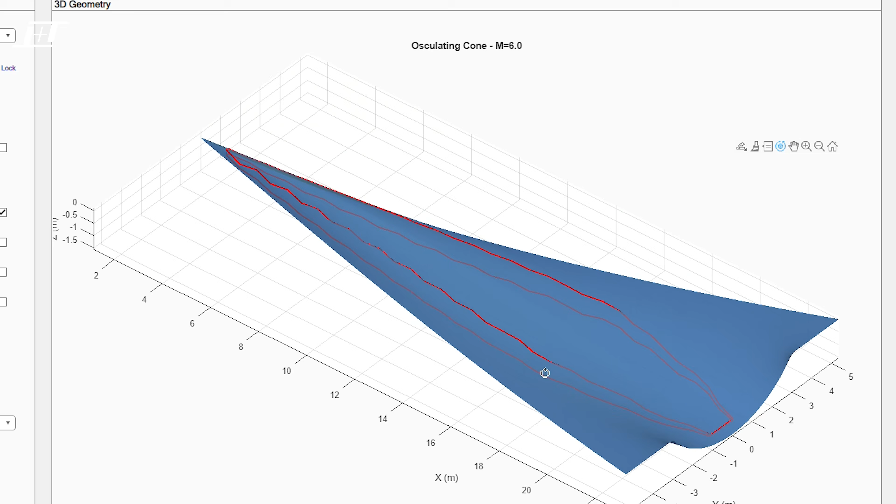Longshot's here to crack the solar system open like an egg. We're building a multi-injection gas accelerator to throw massive vehicles to orbital velocities and put them directly into orbit.

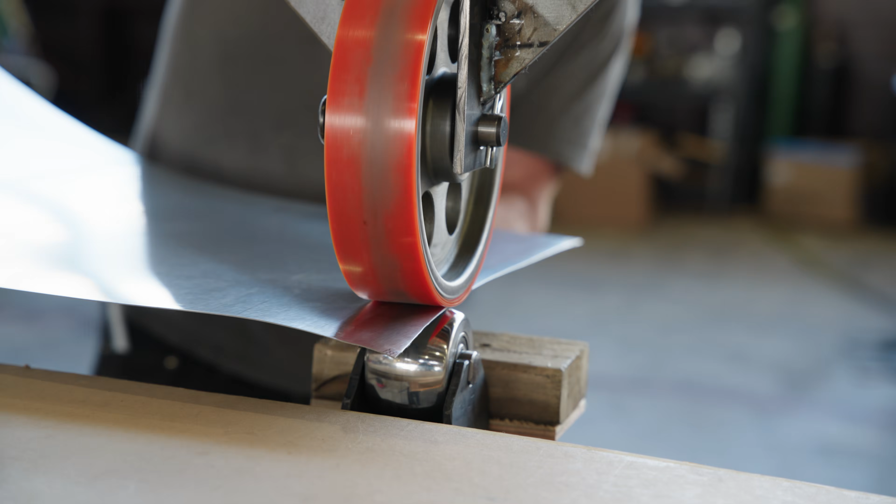The current project we're working on is called the Waverider. It's basically a model of the hypersonic vehicle that will eventually be shooting out of the accelerator.

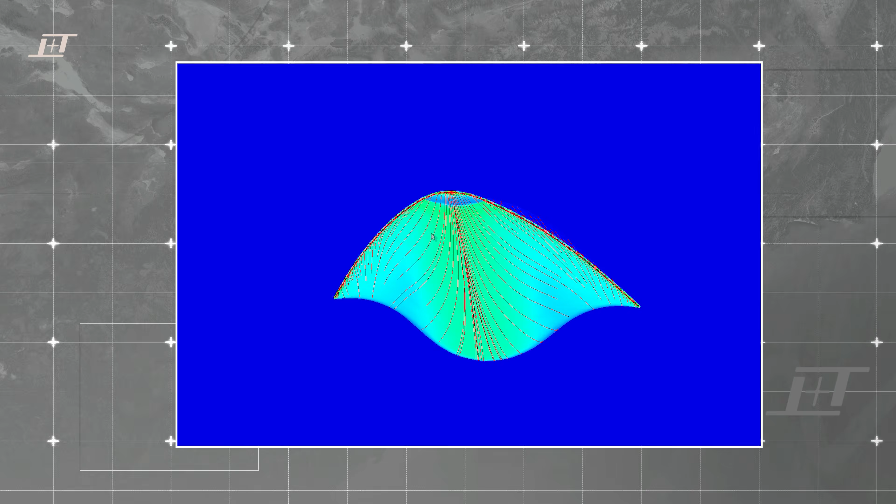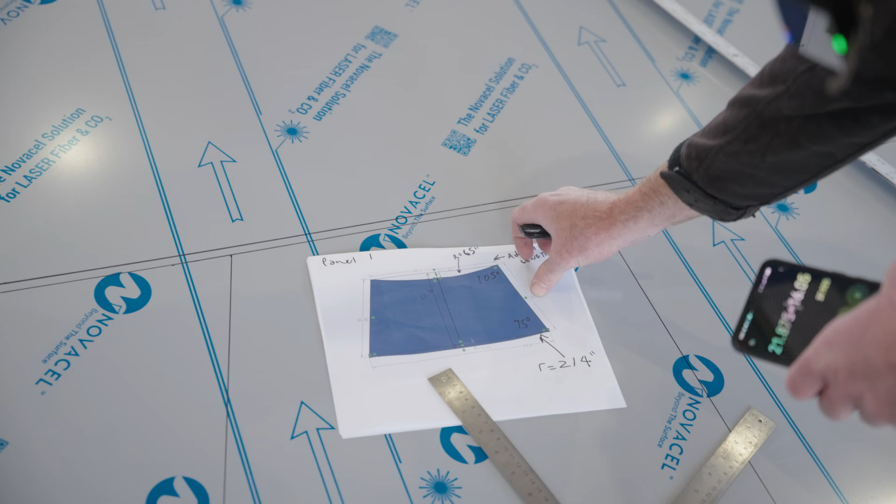The engineers have a MATLAB setup that automatically generates a Waverider for a particular Mach level. Each Mach level has a different shape Waverider associated with it. That outputs a 3D shape, and then I can convert that to a SolidWorks part, and from there we can map out the surface so that we can produce it from sheet metal.

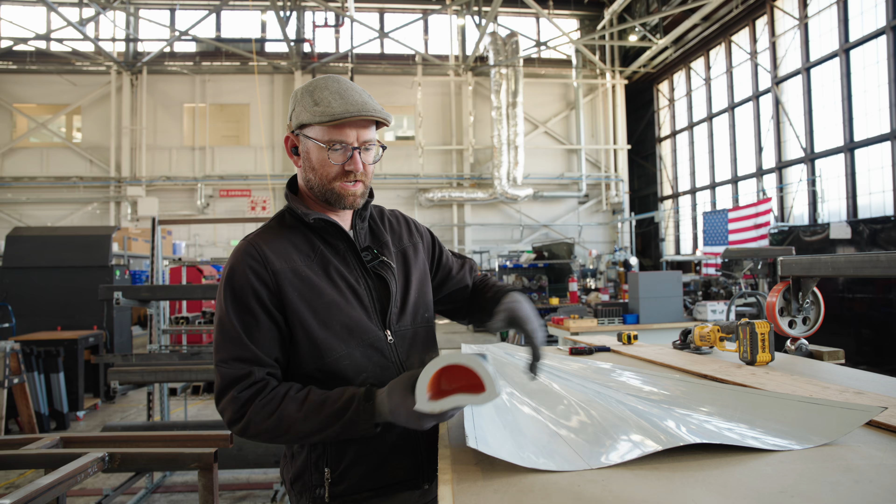This is a small scale version, which fits in our 6-inch accelerator, and we're basically scaling it up. So we have the bottom here, this flange is going to get tipped up, so it's going to be at a 45-degree angle like that, and then we have these other panels that get arched over the top and then riveted onto this flange.

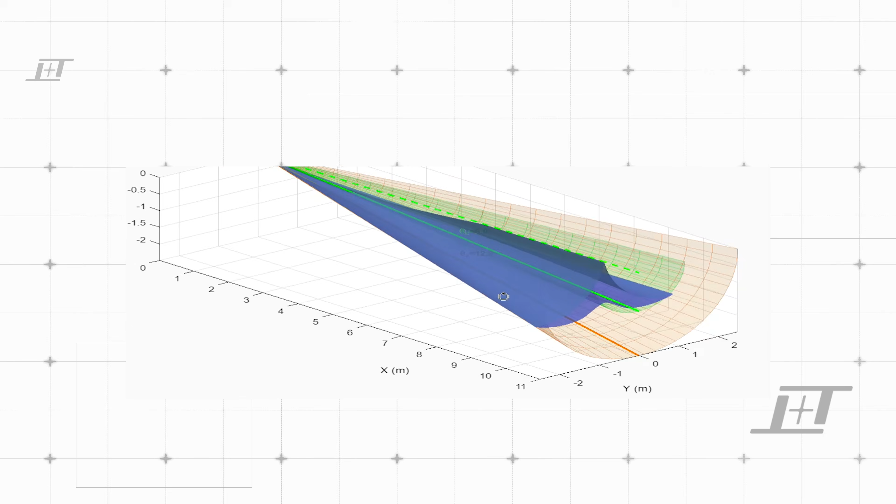We have an internal tool that we can take given design parameters or flight conditions that we'd like to model around, and this one was just a quick example. I believe we chose Mach 6 as the starting point, and then we knew we wanted a certain amount of area inside. So it's rounded at the top right now to ensure that we've got a larger internal volume for, in the future, onboard telemetry, flight computers, whatever payload is desired to be in there.

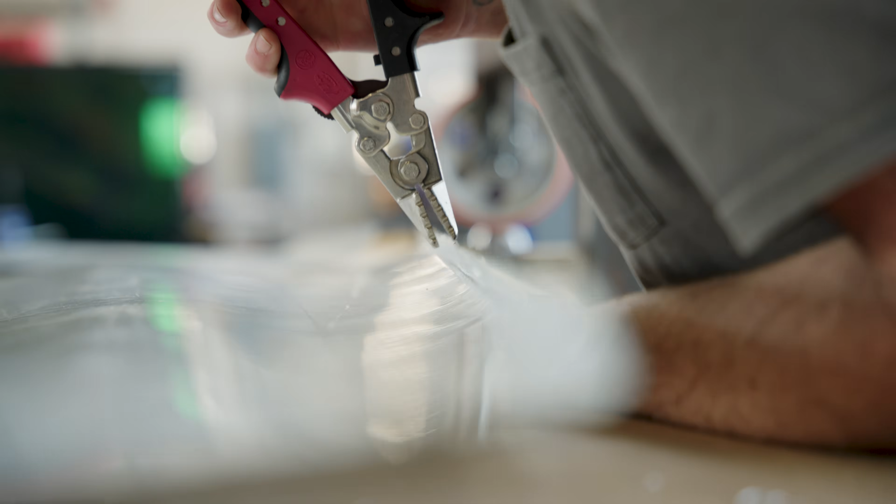We were making some small versions, and there's some initial legwork to figure out what gauge of metal we should use, because we don't want it to be too heavy, but we also want it to be strong. We also need our current tooling to be able to handle it. So I did a couple test pieces, and it seemed like 22 gauge was just fine for what we need, and much lighter, much cheaper, so we went with that route.

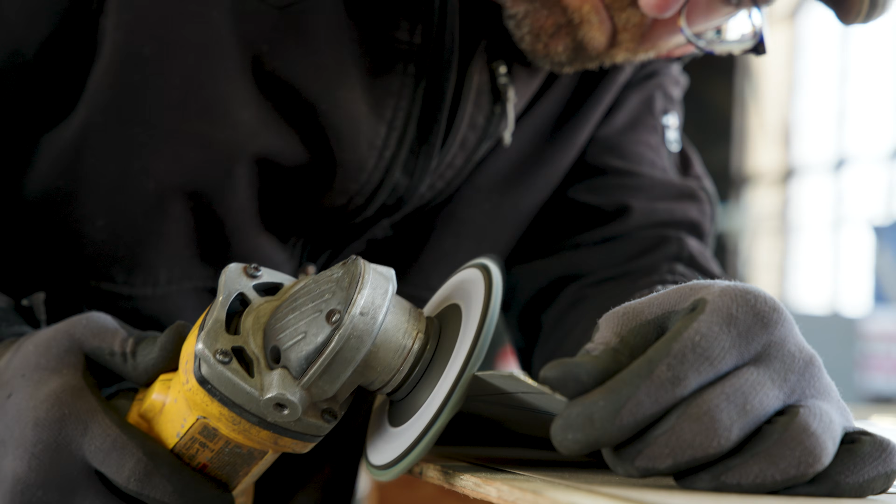Pretty much every project you work on, you have to either make a tool or modify a tool to get it to do what you want. For example, the English wheel, we could have bought one, but it would have taken too long to ship here. So we bought the wheel parts, and then we had metal around, so we just made the English wheel, and that worked pretty great.

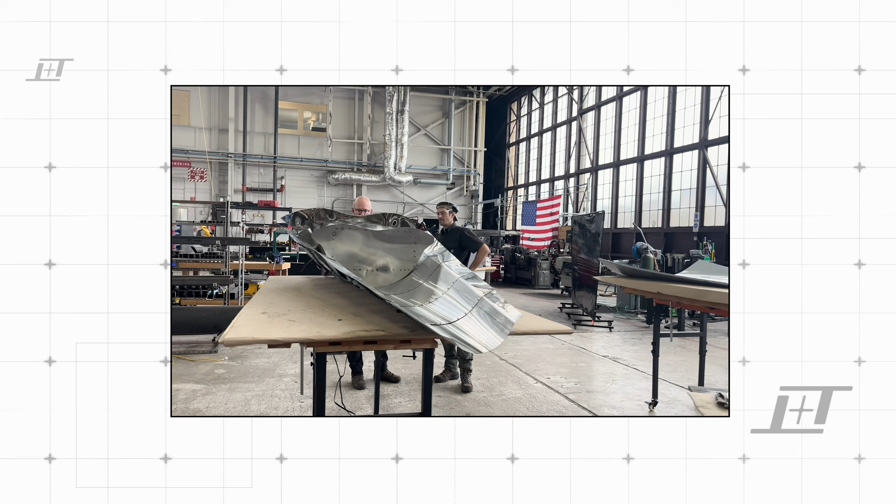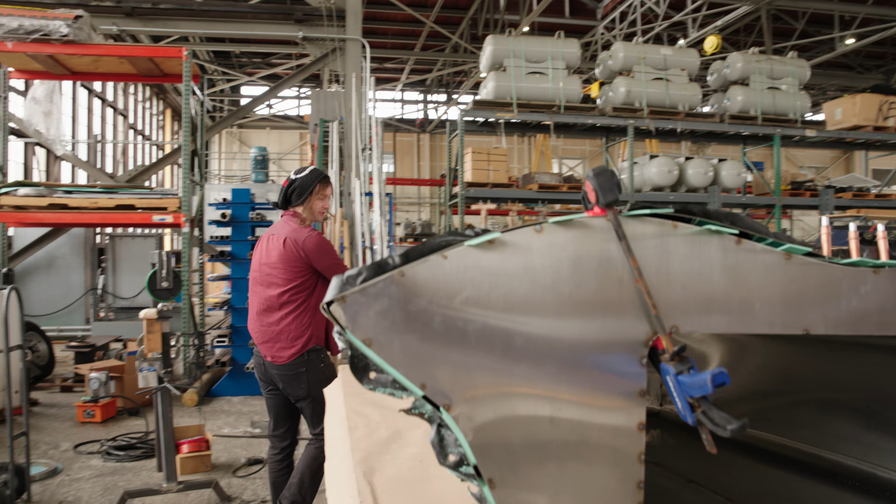This is what we call the compression surface, so basically your lifting surface. The important part is that we could trace a line right along this leading edge all the way to eventually the nose, and it would measure exactly our expected shock angle given our nose geometry.

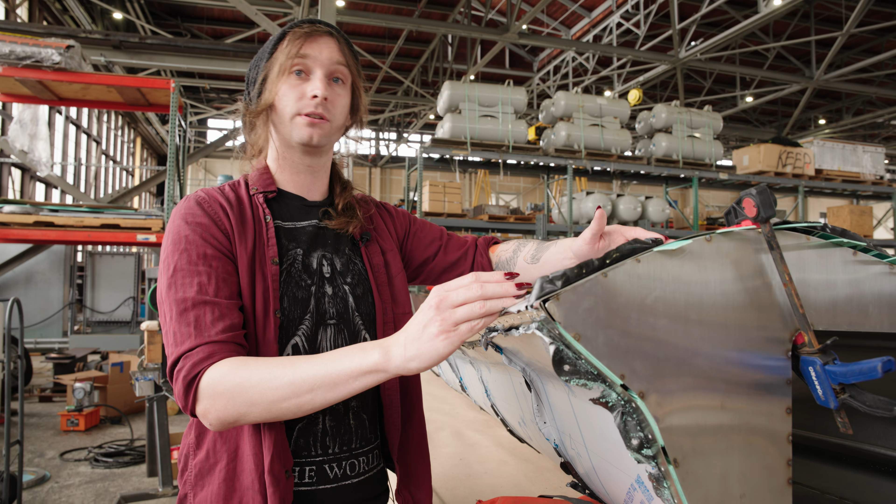If we were to look at this like a plane, these corners would be your wings, and we can decide how much of it we want attached to the actual shockwave and the compressed flow there to dictate if we need more lift. But if we want more lift, that's going to induce more drag, so it just has to be designed around that.

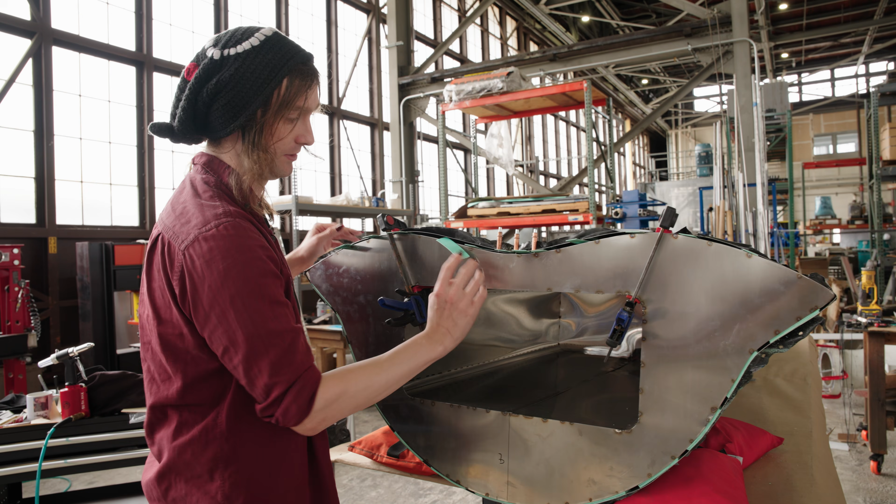That'll be all material selection. The shape right here, the reason it kind of chamfers down is, one, to make sure that it's actually manufacturable, and two, we don't need the whole thing attached to the flow. That would just be too much drag, and at that point you're just shooting a cone. We basically say, what percentage of our wing do we want attached to the flow to generate our lift, and then it goes from there.

So this is a very, very low percentage right now to make sure that we have a nice lift to drag ratio. So we can see it then domed out a little bit over here to make sure we could have some sort of internal sizing.

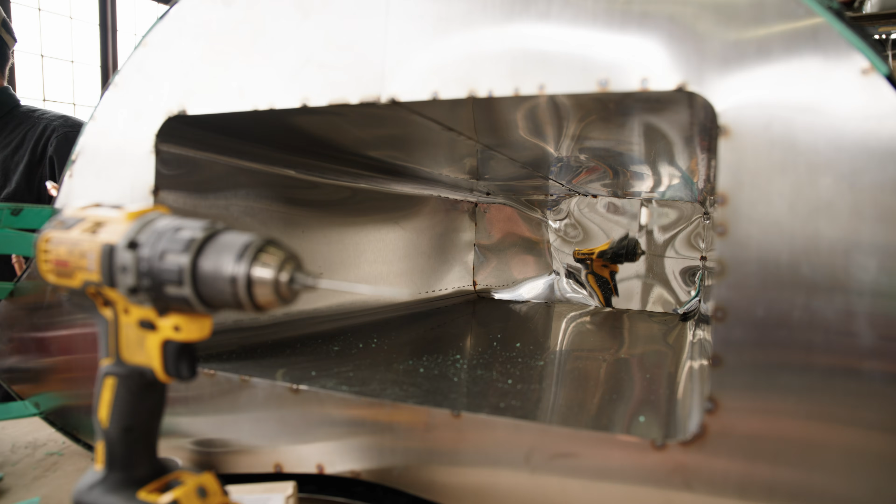Again, we're going to want to launch satellites. We're going to be moving on to the design and analysis phase as the months progress. So right now, just having a starting point for the tool and seeing it kind of come to life is actually being really cool.

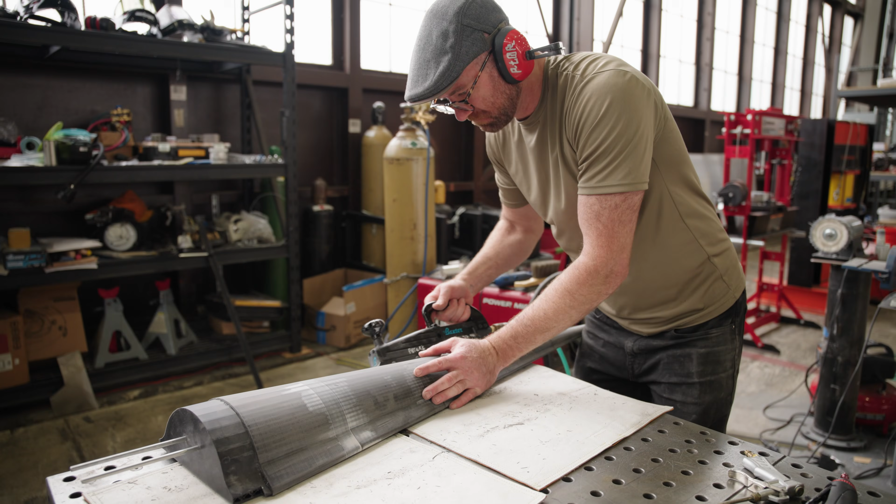I am completely irrationally excited by this. This is the first time we've given form to a bunch of ideas that we've had for a long time about how to build this glide vehicle that can start in the lower atmosphere at crazy high speeds and exit the upper atmosphere at slightly less crazy high speeds.

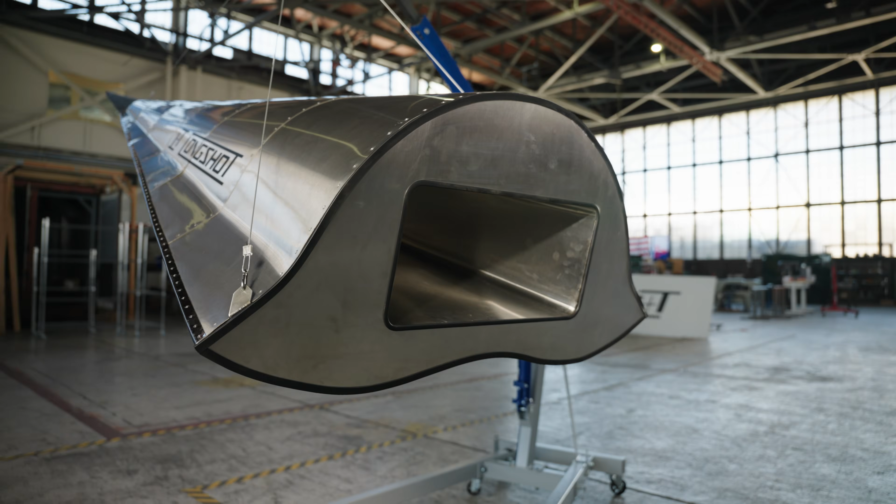What we're doing is not the normal approach for getting things to fly at these speeds, and so it's important to show people what you intend to do so they can understand it. You just have to show. You can only tell so much.

So building this vehicle behind us is a really important part of conveying the highest level vision of the company, and also just, what are we going to do in the next year or two? What could we build? What will it look like? What kind of cargo could it carry?

We're telling the story of that system. We're going to build a big physical model of it that can actually get thrown out of the accelerator, and also we should be able to fit it inside of the accelerator that we're building soon, which I'm really excited about too.